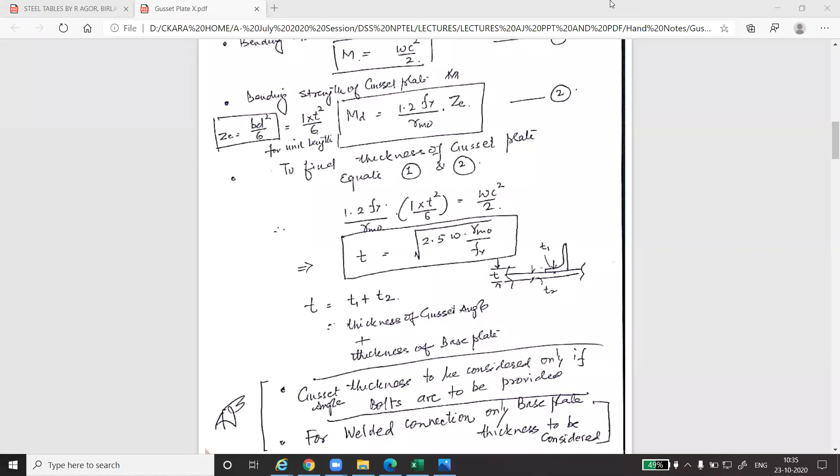Okay, the topic remains the same. We have been discussing the design of column bases. One simple numerical we have done for the slab base type, and just to make you aware about this process, what are the design criteria for gusset base type. So today's lecture shall focus on the basic design criteria, and we also try to solve the numerical based upon that. To save time, I think very quickly we go through the design criteria. The same topic shall be shared, and we shall try to solve the numerical comparatively at a slow pace, so that when we actually do the numerical, that will make things more clear as far as the basic design and fundamental criteria are concerned.

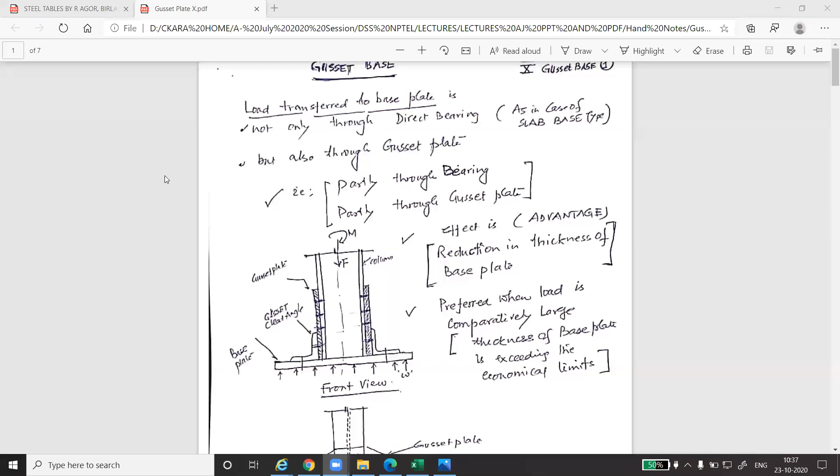Anyhow, so the topic itself says, right now you can see it on the screen, that is the gusset base. What is the gusset base? This process we have clearly discussed yesterday in one of the two lectures, that if the column, maybe I can open it to show you the basic of the gusset plate. The figure that you are seeing right now is the front elevation of the gusset base type column connection.

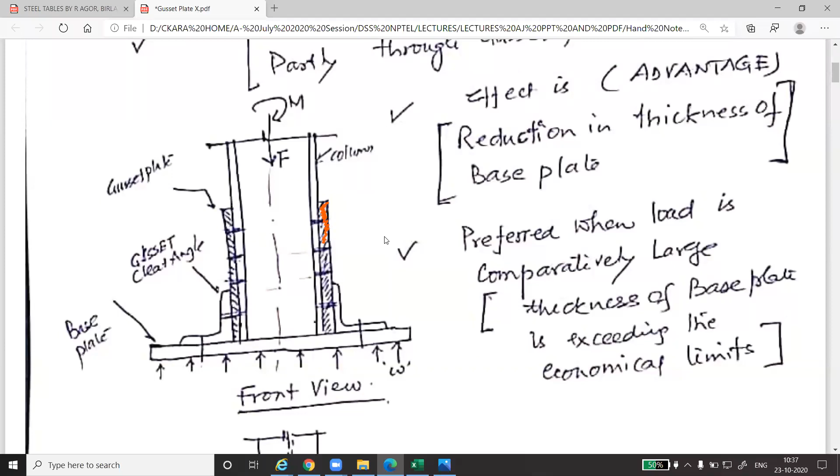In this, the portion that is shaded, like this one, and this one, I'm marking it in red. This is the gusset plate. If you look at the gusset plate from the side, it is... I think I should open the very first lecture on plates, column bases that we have done.

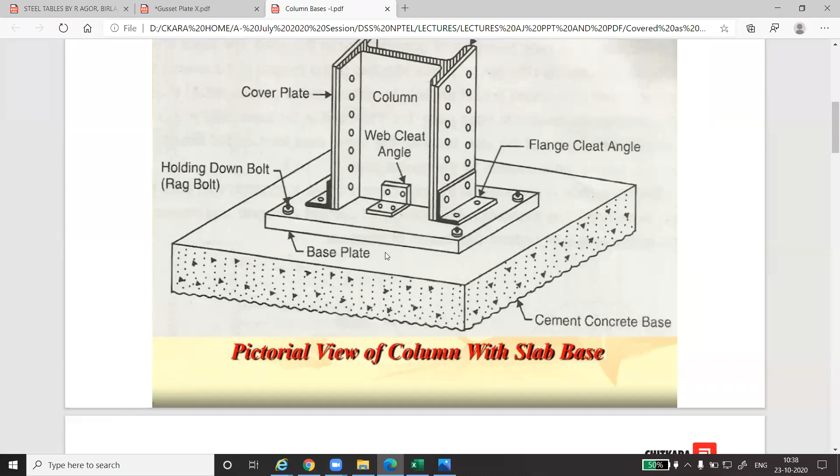This was the PowerPoint slideshow that was discussed in the very first lecture on column base, and this picture is the slab base type column connection. If you look at this figure, there's one member here which goes till the base plate, and the angle covers the bottom part of the plate. If you look at the plate from the side, its shape is like this. This is the side view.

So when the column is provided with the gusset plate, we say that this connection is a gusset type column base connection. And the question is, why do we need to go for the gusset base? This is the principal question, and I have highlighted it in brief.

Let me make one thing clear - do not depend entirely on the notes that I give you. There are many other things you need to refer to: your class notebook, and the textbook that was referred to you in the very beginning. You should always keep studying that, because during the lecture we are not discussing the sentences and other relevant details, which are not that important, but one should be aware of them, because if you do extensive reading, it is very easy to remember the things.

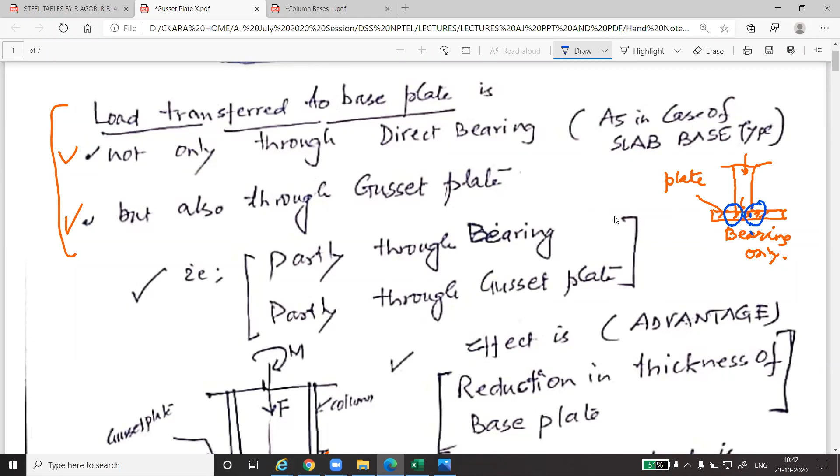And that arrangement is the gusset plate. When the load is more and the thickness of the base plate is coming out very large, we can always go for a gusset plate. That would help us reduce the size or the thickness of the base plate, because the gusset plate helps us partly transfer the load through bearing - that is the function which the slab is doing - and partly through the gusset plate.

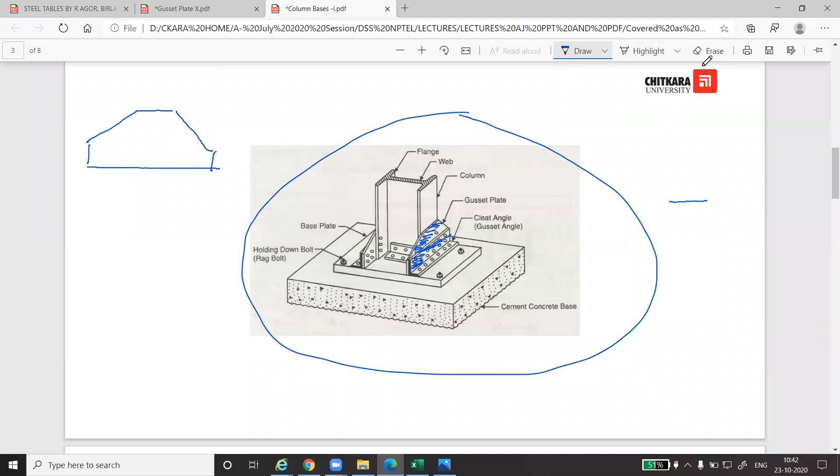If you see this figure - I am erasing this blue line. Now if you see this figure very clearly, you can see that the gusset plate is extending from this end to the far end of the base plate. That means it is spread across the full width of the base plate. If you compare it with the slab base, this is the slab base.

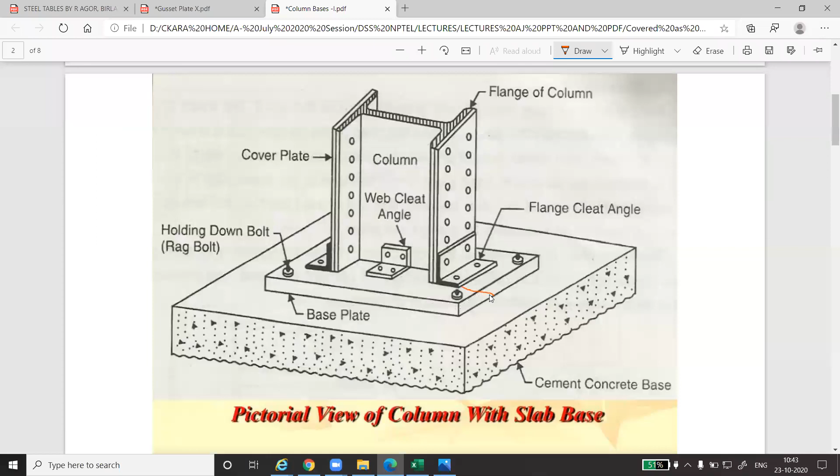Now in slab base, this portion is not covered, the angle extends up to this place only, whereas in case of the gusset plate, we extend the gusset plate up to the end, across the full width of the plate. So that also takes care of the moment, and it helps us to reduce the thickness of the base plate.

That is the prime function. If somebody asks you what is the need of going for the gusset plate when we have the choice to go for the slab base, the answer is that slab base transfers the load through direct bearing. Direct bearing. Like one of the girls was asking, what is the crush load, right?

Crush load, which load were you asking about? So squash load, squash load. So squash load is also the same as we are dealing with.

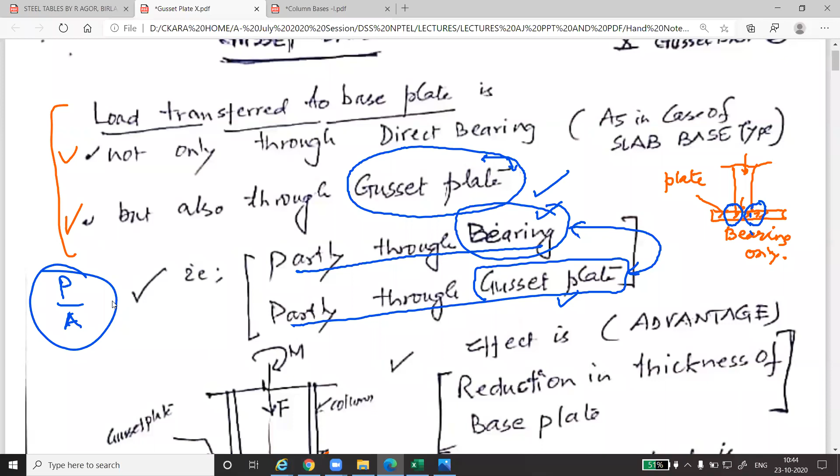We'll come to the answer of that later, but in this context, when we discussed compression members, we established that there are two ways of column failure. One is direct bearing, that is crushing load, crushing and squashing, right? These are two simple terms which are synonyms to each other. And another one is buckling, right? Buckling is the bending of that particular compression member.

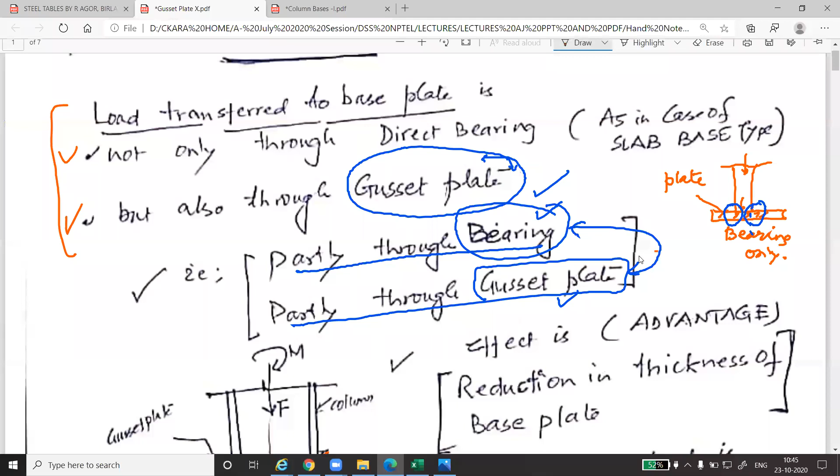So anyhow, I will come to that question later on, but in this context, the load with the help of the gusset plate is transferred partly by bearing and partly by the gusset plate itself, which extends across the full width of the base plate. And what is the advantage already discussed? The effect is that this reduces the thickness of the base plate. It helps us in reduction of the thickness of the base plate, and the size of the base plate is generally around 600 to 800 mm.

Like half a meter or three quarters of a meter, and almost the same width. That means it's a huge weight actually. So to reduce the weight of the plate and also to help us with safe transfer of the load to the base, we go for the gusset plate.

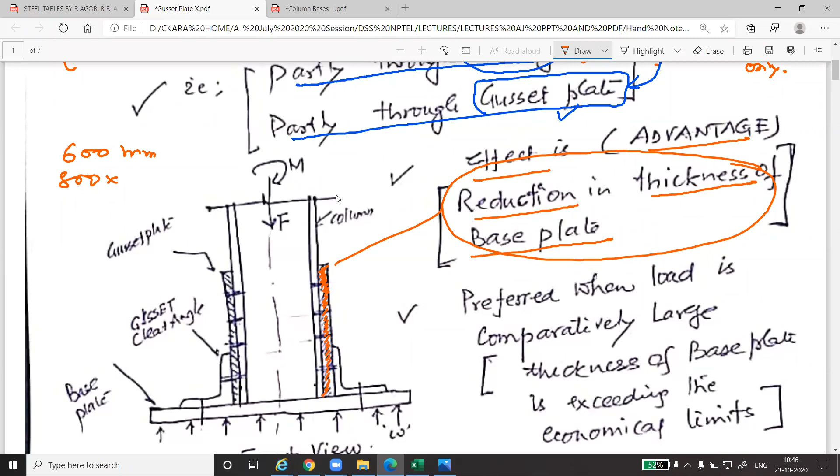And gusset plate, if you look at the elevation, it is provided like this. It has a certain height, right? And it spreads across, as I already explained in the diagram, it runs along the full width of the column, and the main focus is this portion. So if we separate its sides and draw its section, the side view, it looks like this. We taper this portion on the side, because the load is to be transferred vertically. This is just to reduce the weight of the plate, which is insignificant. So this is the general mechanism.

On top of this we then fix an angle, that is the cleat angle, the flange cleat angle, which also runs through the full length, right? So this is the view which you can generate from this side.

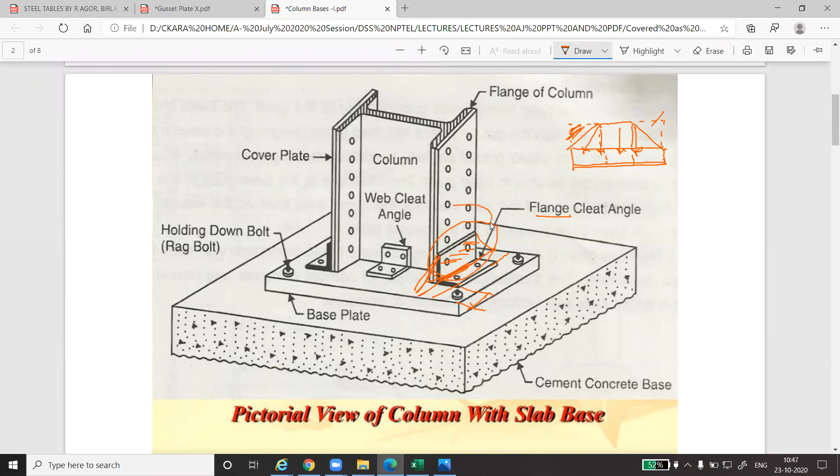Now coming back to this — this is the front view and this is the side view, which I have already shown you. This is the gusset plate, and it runs like this. It is tapered from the side. This is generally just to reduce the weight, because this portion is insignificant. There is no need to go for the full width across the full length of the plate.

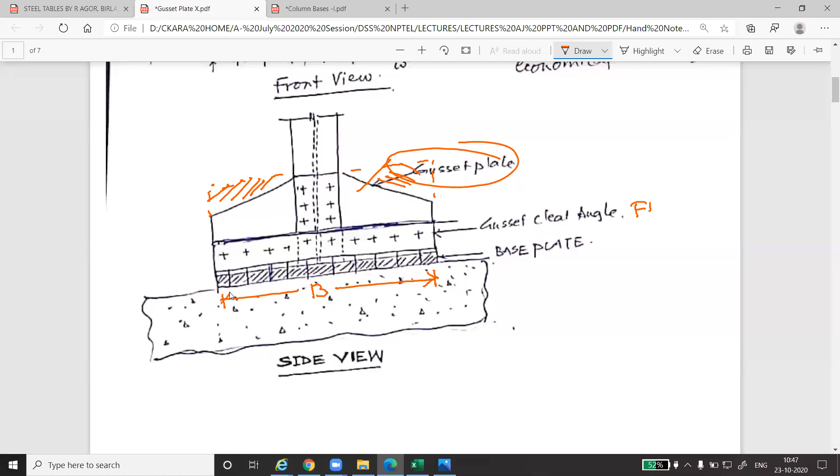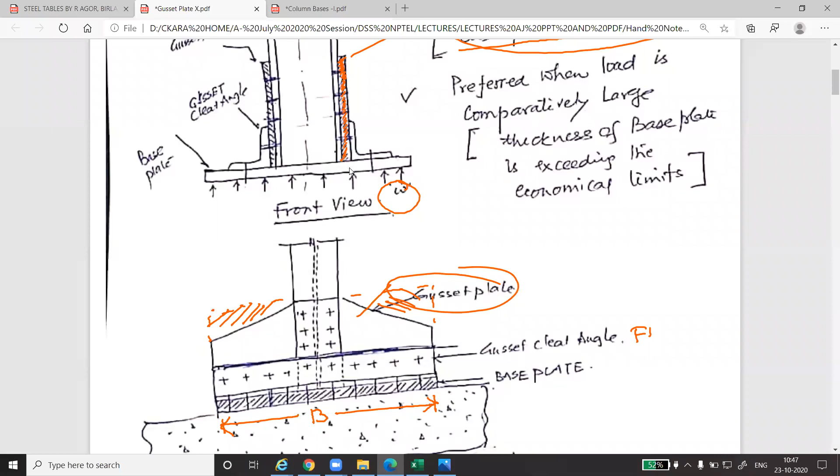And this one is the flange cleat angle. It also runs through the full width of the base plate, right? This is the side view. So hope you are clear with the views and the load which comes over the base plate underneath, that's the reaction, that is small w.

So keeping this basic drawing of the gusset plate in mind, now we are moving to the basic design criteria. And as already discussed, the most critical section is the edge of the column, the edge of the flange of that column.

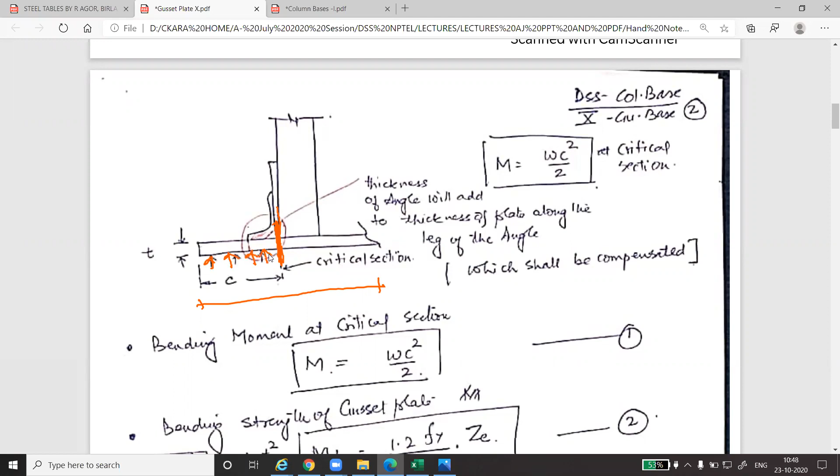And this is the total length, and the load which is causing the moment, like this moment, is due to this. And this moment is M equals W into C square by 2. If I draw it as a symbolic diagram, this is W.

And the moment of this W about this section — for example, this is the XX section, and this length is C, right? — this value is WC square by 2. This is simply WC into C by 2, right? We already know it. And this is the moment at the critical section.

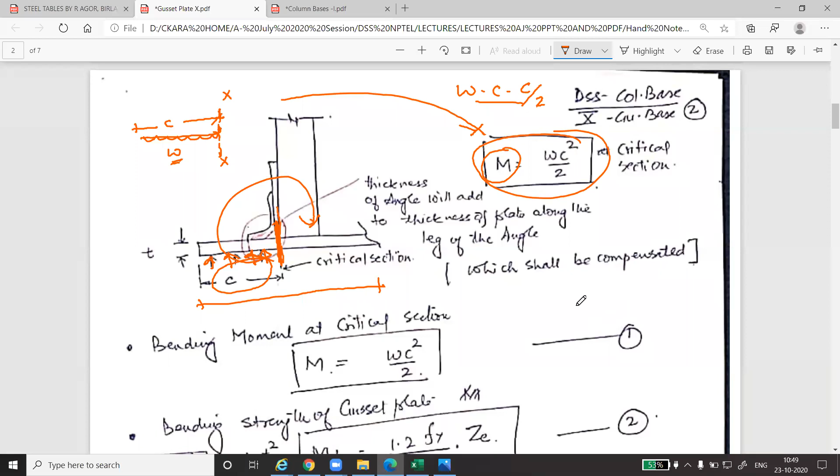There's one line written here: the thickness of the angle will add to the thickness of the plate along the leg of the angle. What does this line mean? Here it is written that... I'm just making it more clear here.

If you look at this section which I have circled here, there's a thick angle provided, as part of the flange angle. This is the angle, right? And wherever the angle is placed, the angle thickness is T1, and the plate thickness is T2. The total thickness required here also helps us reduce the thickness of the base plate.

We calculate the total thickness based on the bending moment that occurs at the edge, using this formula. The total thickness will be the thickness of the angle plus the plate below it. And the thickness above this section will be the thickness of this portion plus the thickness of that portion. If this is T1 and this is T2, the T that we shall be working with will be T1 plus T2.

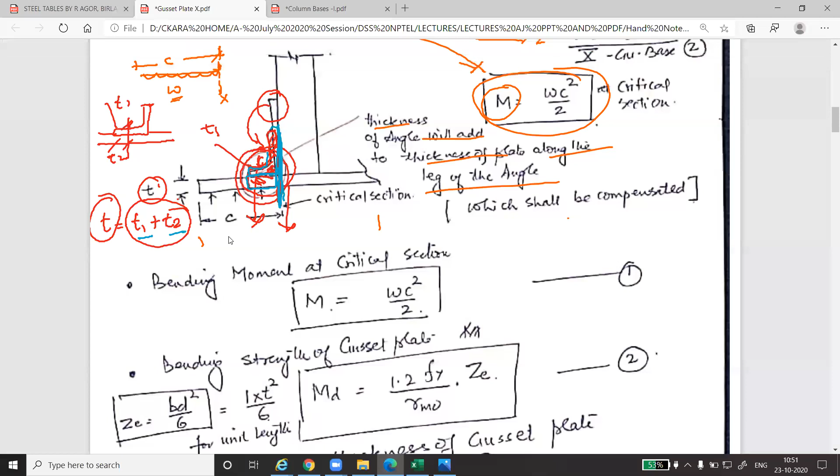So how do we calculate this thickness? We'll derive the relation a little bit, but you do not need to remember the derivation. You can directly remember the final relation.

The bending moment we have already worked out, that is WC square, and the bending strength of the gusset plate provided here is based upon M upon I is equal to F upon Y. This is the bending formula you have studied before, multiplied by these two factors. There's 1.2, so remember MD is equal to 1.2.

This is Fy, that is ZE. What is ZE, can somebody tell me? If you look at this formula, this is M is equal to F into I upon Y. And this I upon Y, this is the section modulus. If you remember, you have studied this section modulus.

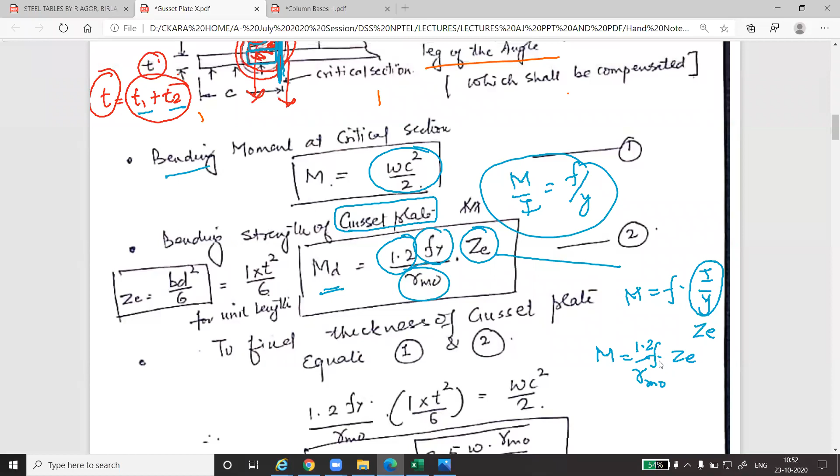So M is equal to F into ZE, and we have applied a factor depending on the design code, which you just need to remember. This is the formula we shall apply to balance this moment and the bending strength of the gusset plate, so we equate both these equations.

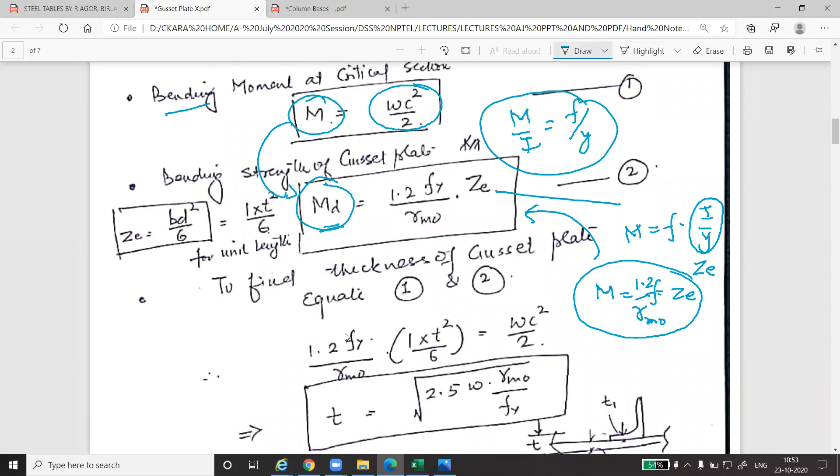I'm just rubbing it off. So we equate these two terms, M with MD, equating 1 and 2. This 1 into T square is the section modulus, that is B, as this is BD square. We calculate it for unit length, taking length as 1, and thickness as T. So keeping unit length and thickness as T, this is B, that is 1 meter, and T square, that is thickness, divided by 6.

So the formula 1.2 Fy divided by gamma MO is equal to WC square by 2. Equating both, we get this relation: T is equal to the square root of 2.5 W gamma MO divided by Fy. You can directly remember this formula for the thickness of the plate at the critical section. Let me reiterate: the thickness we are calculating is the thickness of the angle here.

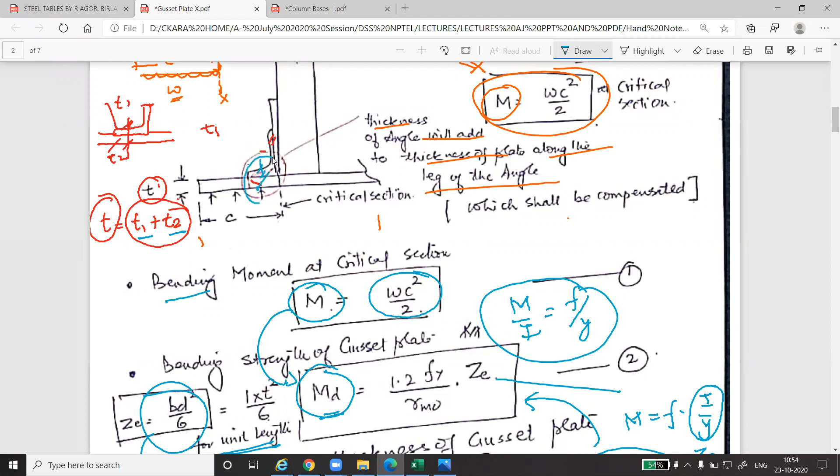Coming back to this diagram, the thickness that we are calculating is the thickness of the angle at the critical section. That means T1 and T2 here. This is what we are calculating with this formula, which says that the total thickness at the critical section is equal to...

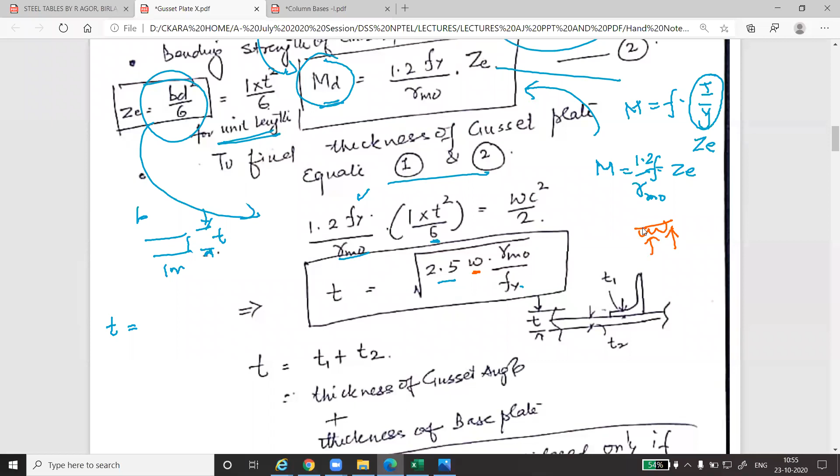2.5 W, where W is the pressure coming from underneath. This shall be calculated depending on the base area of that plate, as we calculated in the previous question. Gamma MO and Fy you already know, so T is equal to 2.5 W gamma MO divided by Fy. You should remember this.

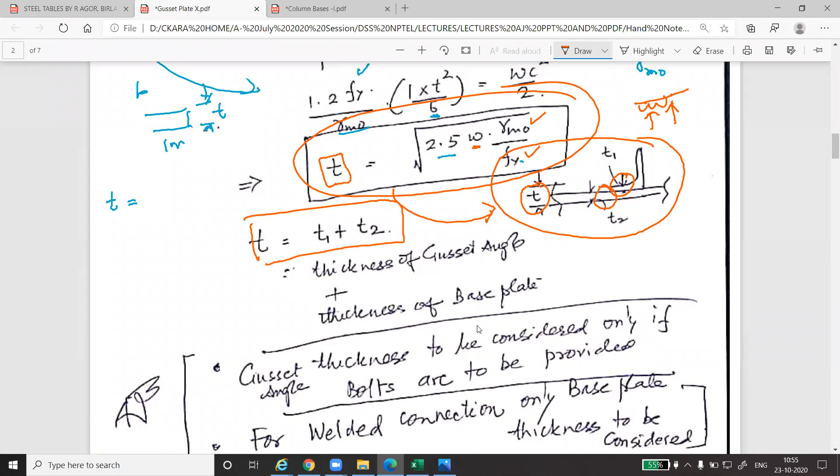Based upon this, it's also clear what we are talking about with the T. The T that we are calculating with this formula is the total thickness, that is thickness of the angle plus thickness of the plate. I'm repeating this so you do not make a mistake here. So we work out the thickness, T1 plus T2, and then we design the rest of the process.

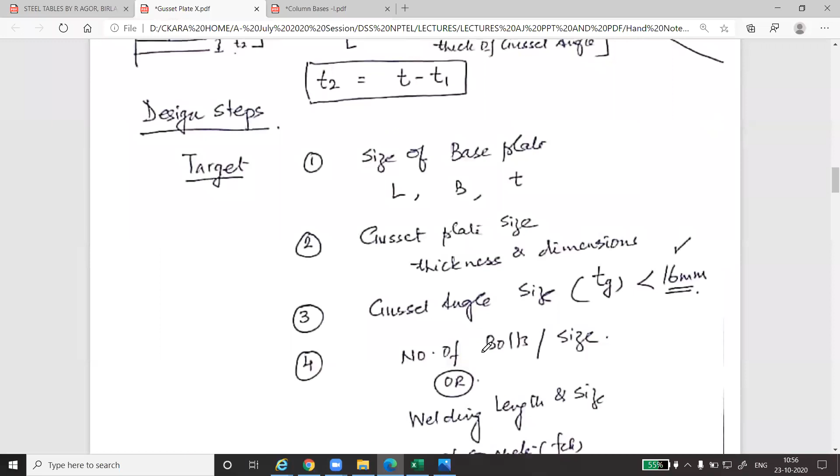We need to understand this portion, then we directly move to the design of the gusset plate connection. When we say we have to design the gusset column connection, what exactly are we talking about? The size of the base plate - as we did in the previous question, we have to find L, we have to find B, and we have to find the thickness of that base plate.

The second thing, which is different from the previous question, is that we have to define the gusset plate size, thickness and dimensions. This gusset plate, which is tapered, we have to work out its dimensions.

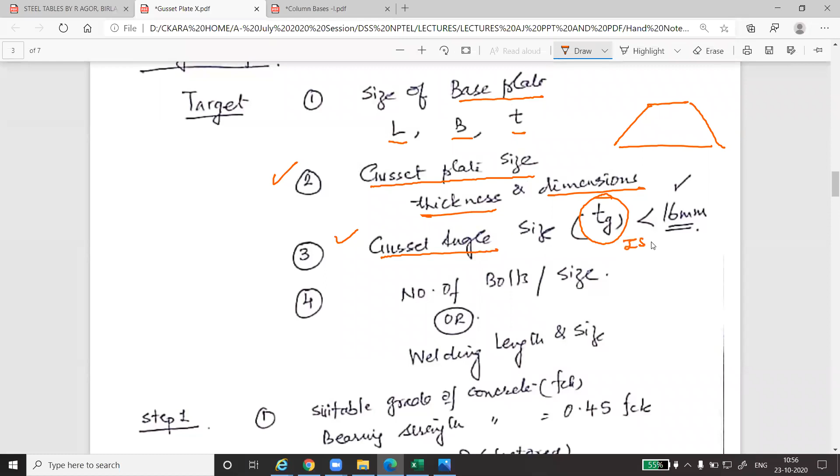Then the gusset angle TG, we have to design that, and the thickness - as per IS 800, the thickness of the angle that is to be selected for the gusset angle should be less than 16 mm. You should remember this, that TG should not be less than the thickness of the angle which is provided here.

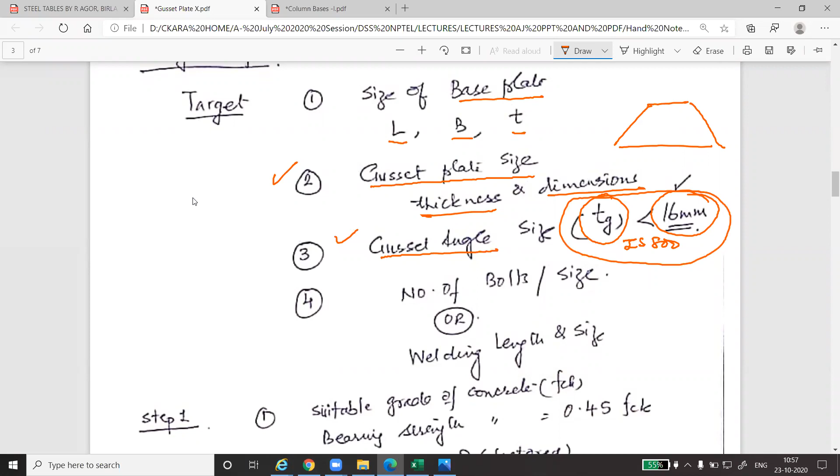This is the thickness of the leg. For example, ISA 150 into 150, we will check from the steel table which thickness is available. So we shall also be discussing this.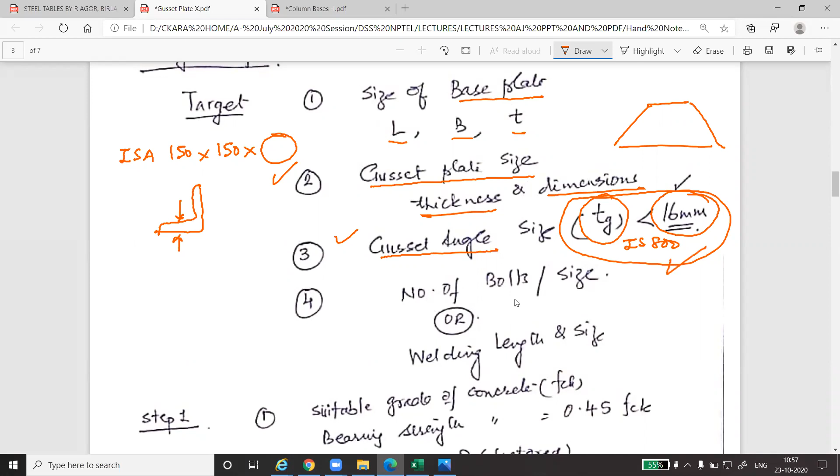Number of bolts is to be designed, and welding size if it is to be designed with the help of welding. So these are the design steps. First of all, as we have done in the slab base type, we assume the FCK.

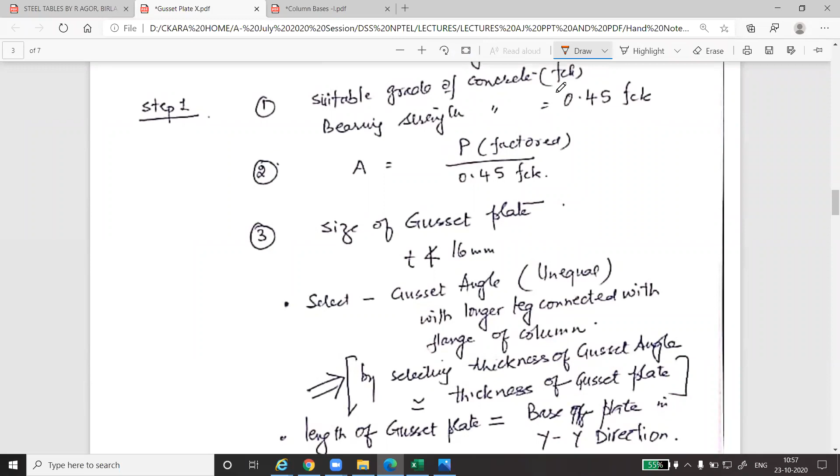If FCK is not given, it is the nominal characteristic strength of the concrete. For example, if it is M20, then it has to be 20; if it is M40, then we work out the bearing strength and the area required. We divide the total factored load given by 0.45 FCK to get the required area.

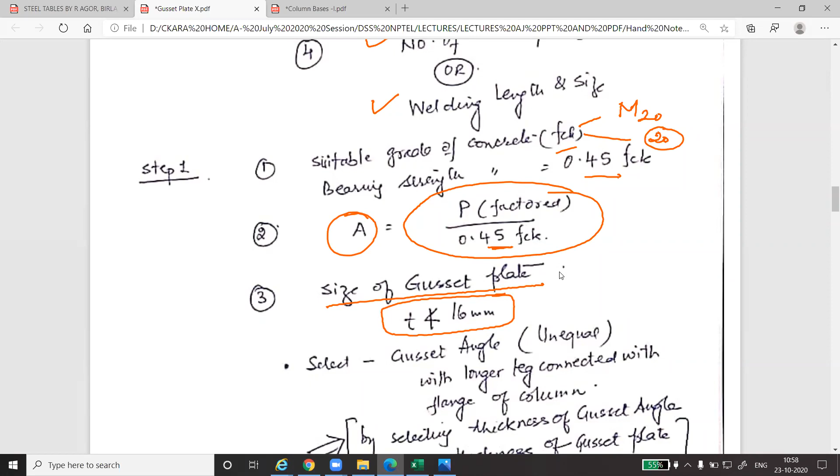Then we select the size of the gusset plate. As mentioned, the size of the gusset plate should not be less than 16 mm - thickness of the plate should not be less than 16 mm. All these steps shall be clear to you when we do the numerical.

So we are starting with the numerical. Before we start, let's look at certain basic dimensions that we shall be referring to. This is the plan of the gusset plate. This is the column, and this is the thickness of the flange here.

This dimension is the thickness of the flange, and this one is the thickness of the gusset plate, that is TG, and this one is the thickness of the angle, that is TA. From here to here is the length of the angle, and this one is the overhang. The same is on the other side. Are you clear with this?

If you look at the elevation, this is the side of the column, this is the flange width, this is the thickness of the gusset plate, thickness of the angle, and from here to here is the length of the leg of the angle, and the rest of the portion is overhang. We need to use this nomenclature to carry forward the design.

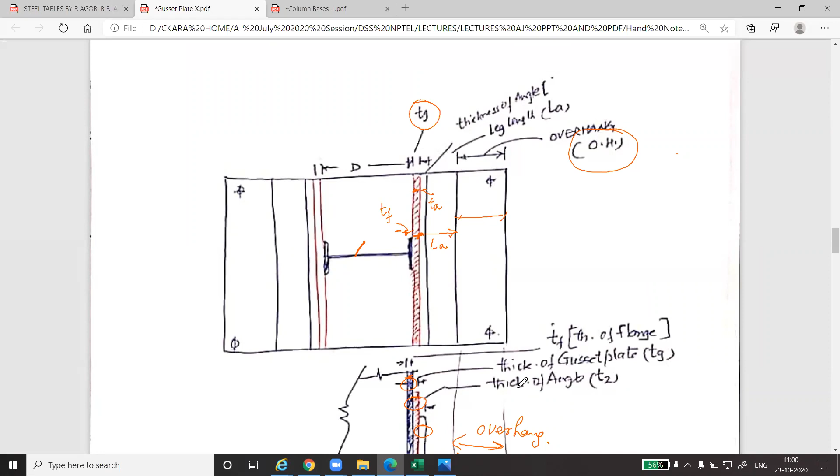Hello. Yes sir, please repeat the elevation once, sir. Elevation, this one. Yes sir. If you compare it with the plan, you can always see this - let me erase it once and redo it.

How many lines can you see?

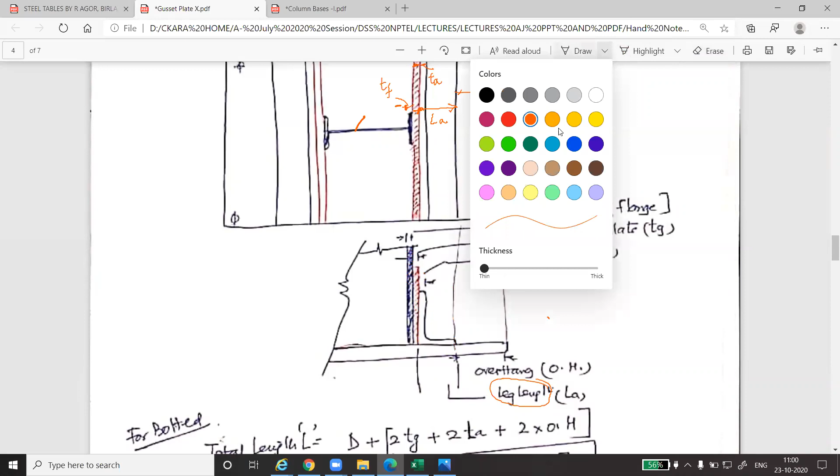This is thickness of the flange of the column, TF. Next is thickness of the gusset plate, this is TG. Then this one, thickness of the leg of the angle, TA.

And then the length of the leg, this line, right? This is LA, and then whatever portion is left at the end of the plate, that will be overhang, right? So moving ahead.

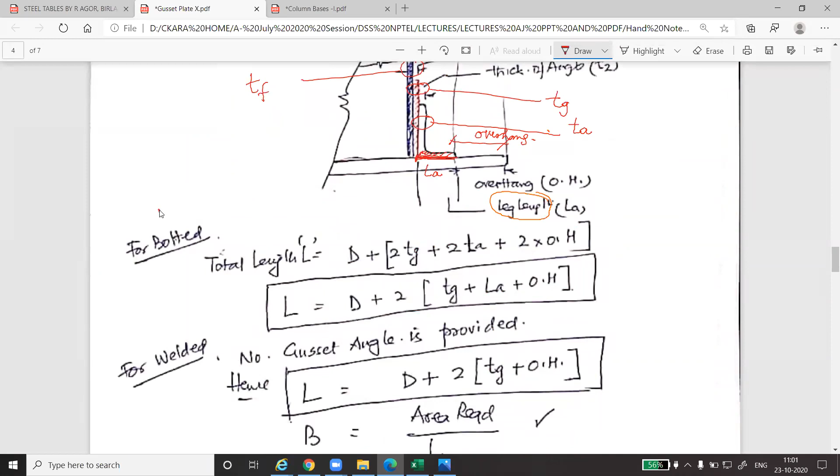The same has been mentioned here, that if the bolt connections are there, note this point - the angle, that is the gusset angle, connected with flange is only provided if bolt connections are used. If the bolts are not used, then we do not provide this angle.

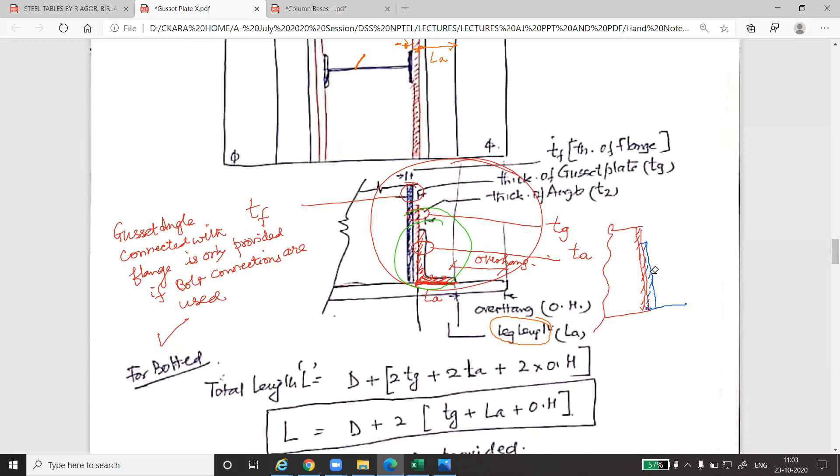So covering all these dimensions here, we are now looking at the total length of the base plate. The total length of the base plate is equal to D. You look at this diagram. The total length of the plate is from here to here, right? This will be the length, and this is equal to D, depth of the column, right?

Plus thickness of the flange gusset plate, that is fitted on both sides. This is 2 into TG, right? Next, plus what comes ahead?

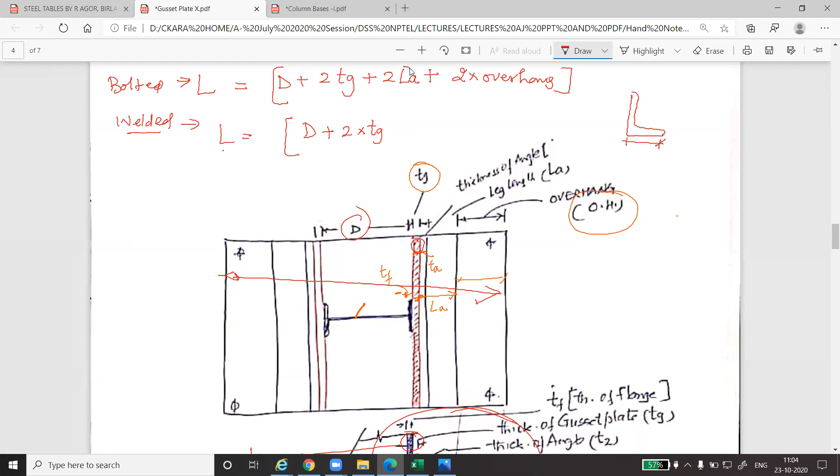Similarly, this is for bolted connection. If it is welded, then length will be equal to D plus 2 into TG. LA will not remain there - this will not be there because we are not providing the angle in welded connection. Plus 2 into overhang.

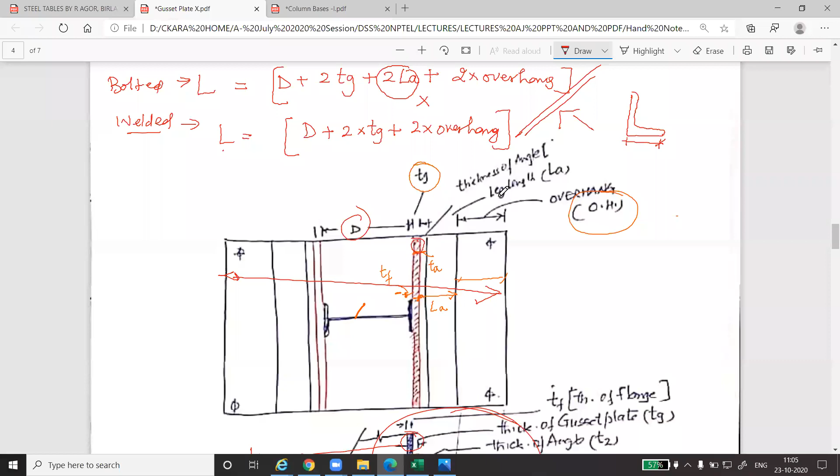So these two things you remember - just be very clear, not remember. If it is clear then automatically it's a simple addition of the dimensions, right? So then if you are done with the L, you can easily calculate the width, because width is the total area which is required divided by L. You can go for B, right?

Then you check step number 5, bearing pressure - is it force divided by area which we have provided, and it should be less than 0.45 FCK which we were discussing, what is 9 for M20 - this value is 0.45 into 20 and this is 9 Newton per mm square, right?

Then step number 6, thickness of the base plate - whatever formula we discussed, this is 2.5 W gamma MO divided by Fy. The value of W will come from here, gamma MO you know it, Fy you know it for the given steel. Then you can calculate the thickness of the base plate.

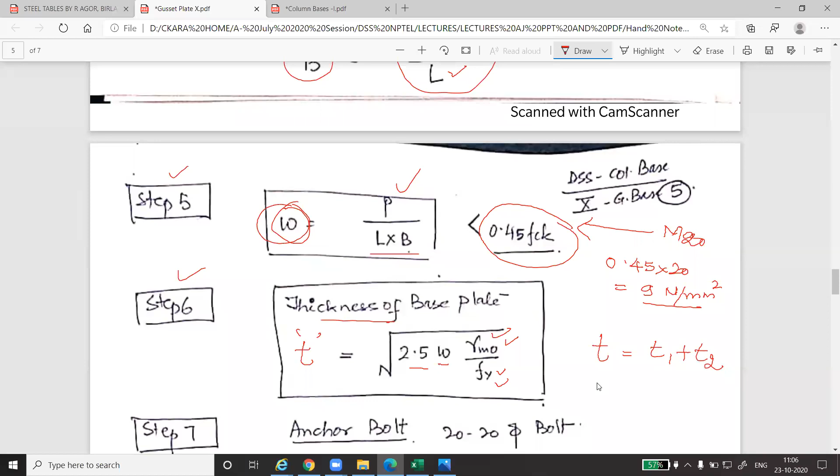And thickness of the base plate, mind you, this is the thickness of the angle if it is provided, if it is a bolted connection, plus thickness of the base plate, right? When we do the numerical, we will work this out that thickness of the base plate has to be total thickness minus the thickness of the angle. So this will be the actual size of the plate.

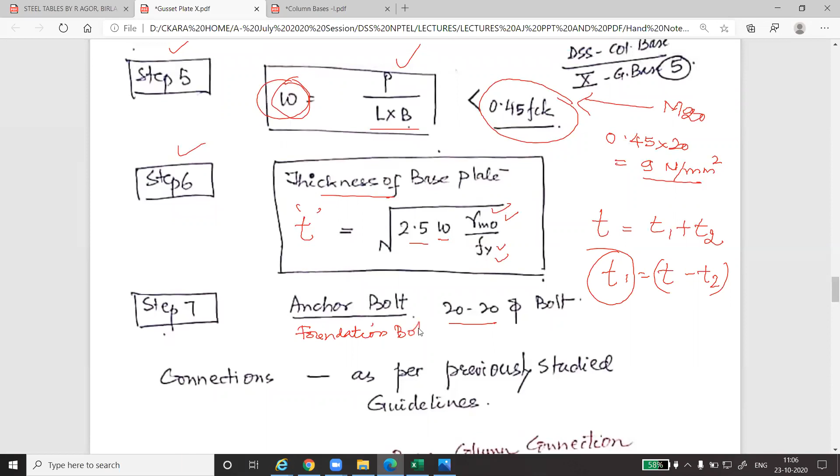Then anchor bolt, which we call foundation bolt, these are to be provided 4 numbers at each corner, 4 numbers, right? Length is also there. Then connection - if it is welded, then we have to check the welding length as we did last time. If it is bolt, then we have to calculate the bolt value, and then total load divided by the bolt value, we can calculate the total number of bolts, right? So with this basic process, we are now shifting to the numerical.

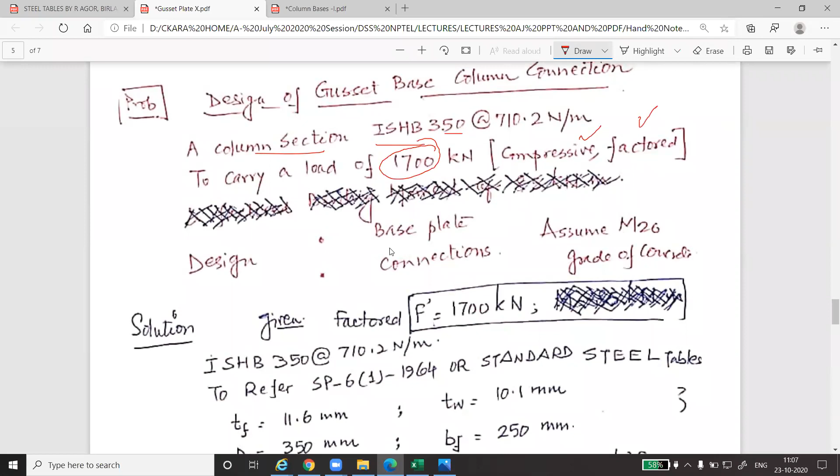You can note down the statement. A column ISHB 350 has to carry a load of 1700 kilonewton, compressive and factored. It is given, and then we design the base plate and connections. Assume M20 grade of concrete.

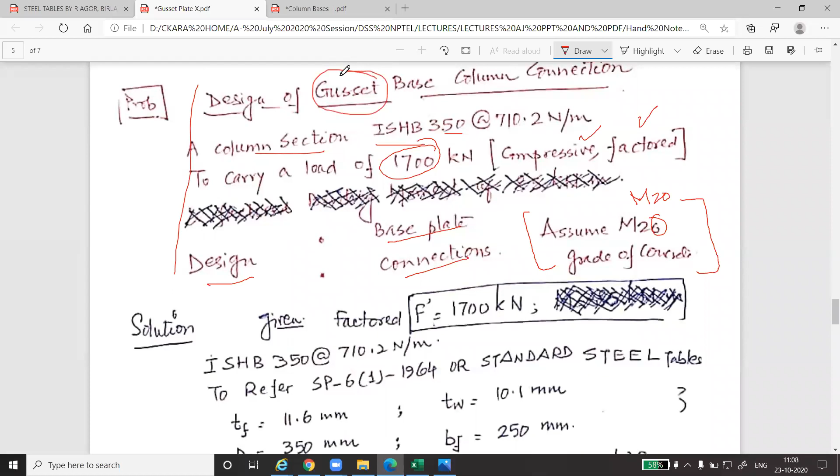This is a simple statement. We have to design a gusset plate connection. As we discussed earlier, it's always good to write down the basic fundamental dimensions and parameters from the steel tables or the IS code.

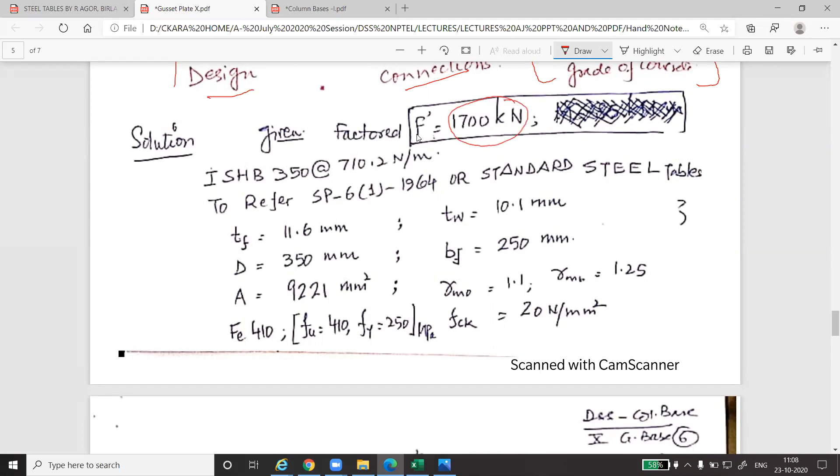This is given as 1700, ISHB. For ISHB, referring to the steel table, you can get TF. This is SP 6(1), which we already covered - the steel table is part of this SP standard publication 6(1), 1964. The steel table is copied here by the publishers because the rest of that portion is not required, so we always refer to the steel table.

So these are the basic parameters. Thickness of the flange, depth is 350. Area of the column is 9221 mm square. Thickness of web is 10.1. Width of the flange - these are the basic properties of the column given to us. All these dimensions are good to note down from the steel table. This dimension is 250, this dimension is 350. The rest of the dimensions, thickness of web and thickness of flange, are given.

Gamma mo is 1.1, you remember that so far. Gamma mb is 1.25, and for fe 410, fu is 410. These are the basic things you jot down at one corner of the sheet. Then we start with the numerical.

The very first step is to calculate the area required, the base area. This is factored load divided by 0.45 FCK. So this is 1700 into 10 raised to power 3 divided by 9. So the area required is coming out to be this.

You can also do the calculation in parallel. Just let me know if some calculations are wrong somewhere. Based upon this - this is important - you have to select the angle.

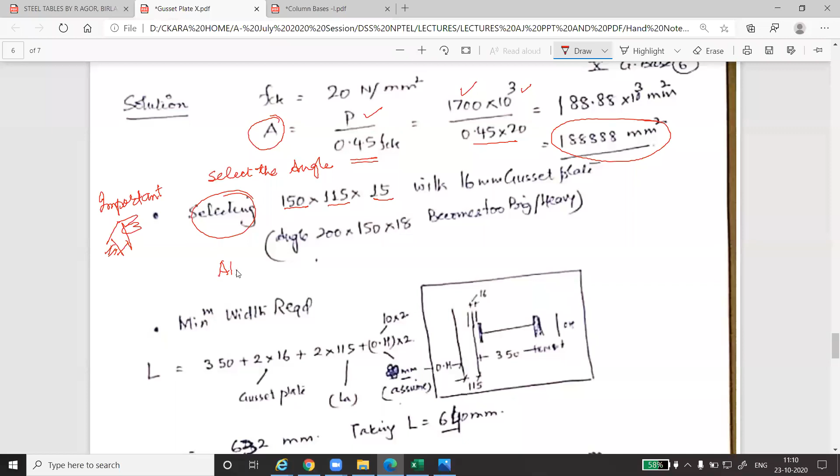Select the angle. We are presuming there is a bolted connection. It is 150 by 115 by 15. One thing you need to keep in mind here - always select an unequal angle.

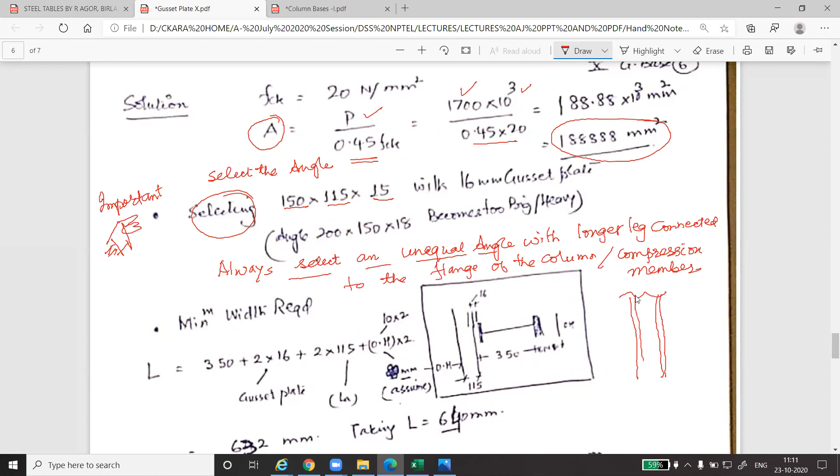Always select an unequal angle with the longer leg connected to the flange of the column or compression member. If this is your column here, this is the thickness of the flange, and the angle we have to connect should be unequal, because the more the length of the angle connected with the column, the lesser will be the thickness of the plate.

So this length which is 150 and this length is 115 - the longer leg helps to reduce the thickness of the plate. This is how it works - if we take 150 by 150 by 15, then this 115 required would be a wastage of material. So we are concerned with the longer length connected with the column.

You need to keep this in mind. First, always select an unequal angle, and then connect the longer leg with the column. So this is important. Now calculate the length, 350, as we just discussed.

This is 350, then 2 into thickness of the gusset plate, which we have presumed as 16 mm, because the minimum size of the gusset plate required is 16 mm - it shall not be less than 16 mm. We have presumed it here, so we can directly select with this 16 mm. We will check later whether this is sufficient or not. 2 into 115, this is length of the angle.

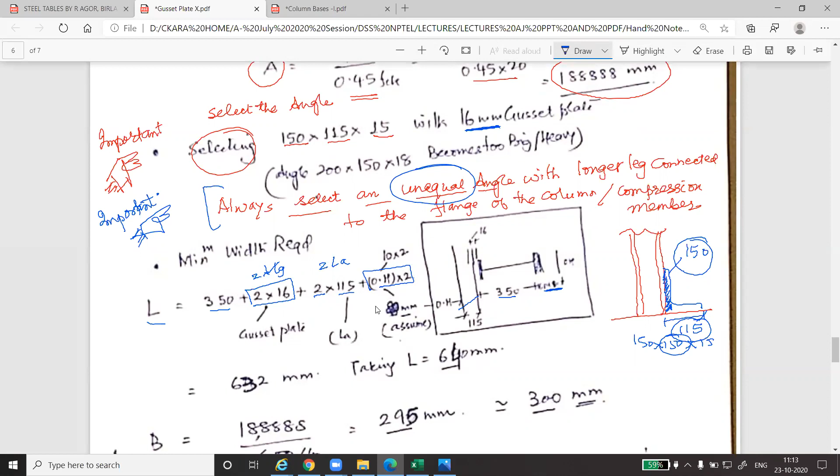This length, 2 into LA, 2 into LG, and then the overhang - you can presume it to be somewhere between 10mm to 20mm. This is also something you have to remember, because we will work out the length based on this. According to the length, then we will work out the pressure. If we need to increase the length later, then we will revise it, but for now we take it as 10 to 20 mm. So I have taken it here as 10. This is assumed.

This is LA. Thickness of the plate, gusset plate is also taken as the minimum. So we have worked out, adding all these figures, this is 632. So as per the calculation concerned, I have taken it as...

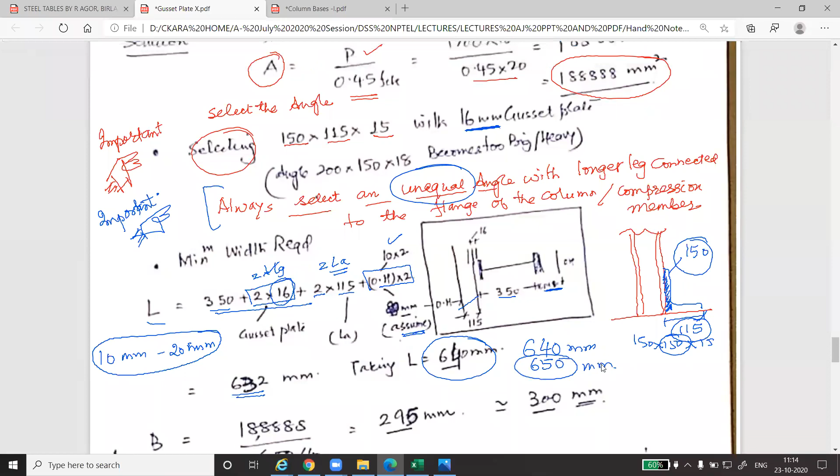640 mm, or to sound like a good figure, you can always go for 650 mm. Otherwise, you can always go for 640 or 650. So now the width of the plate, total load...

which we calculated above, divided by width of the plate, this is area, total area, then divided by the plate dimension selected. According to this, the width is coming out to 295, so I have taken it as 300. So ultimately, the plate that is required is 640 multiplied by 300.

Now we have to check whether this plate size is sufficient or not. Then we have to check the plate load divided by the area of the plate that we have selected. The selected size is here. I have taken it as 650. 650 divided, multiplied with 300.

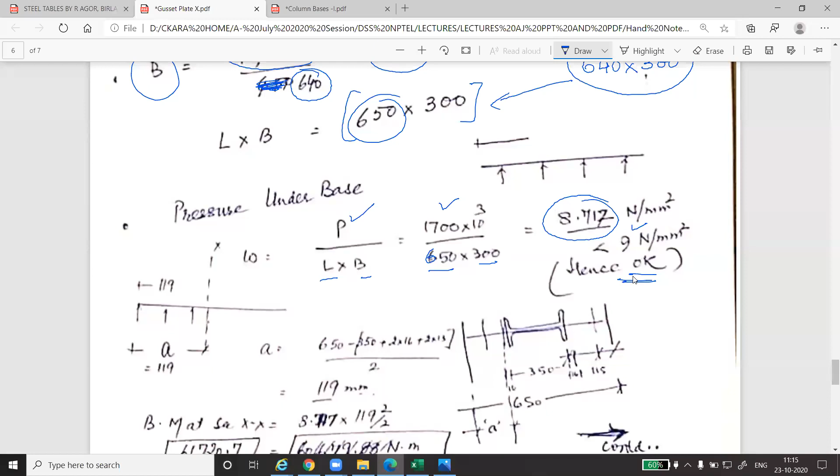So the intensity that is coming out to be 8.717 Newton per mm square, and we have to check whether it is less than 9 or not. So it is just sufficient, and we are well within the dimensions.

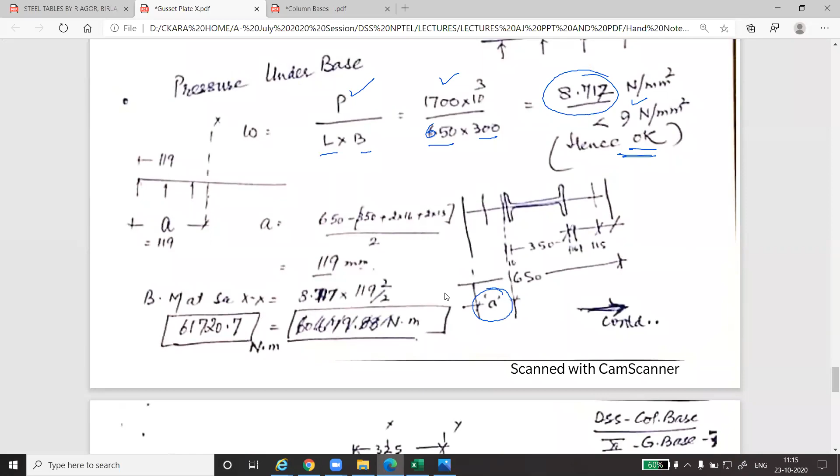Now we have to check this dimension A, the C which we initially wrote. If you look at this page, this dimension, so this C we have to calculate, because we need to calculate WC square by 2, and accordingly we need to check the thickness of the plate. So this is the design which is required to check the thickness of the plate.

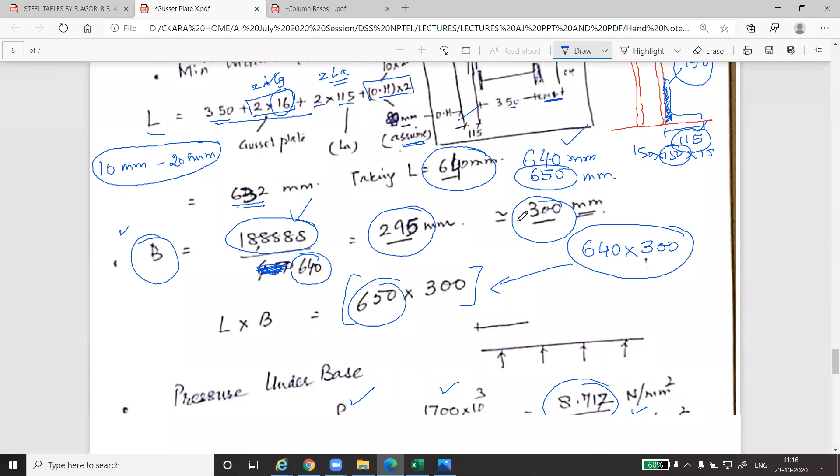To check the thickness of the plate, we just look at this figure which is drawn on the right hand side. The total length is 650. From that we minus 350, meaning we look from here. Half of 350, if you look at that, the whole figure is divided by 2.

The 650 minus 350 minus thickness of the gusset plate, that's 2 into 16, and minus the overhang. So if we work out, this dimension is coming out to 119, and this is basically A, or you can also name it as C. So according to this is WC square by 2.

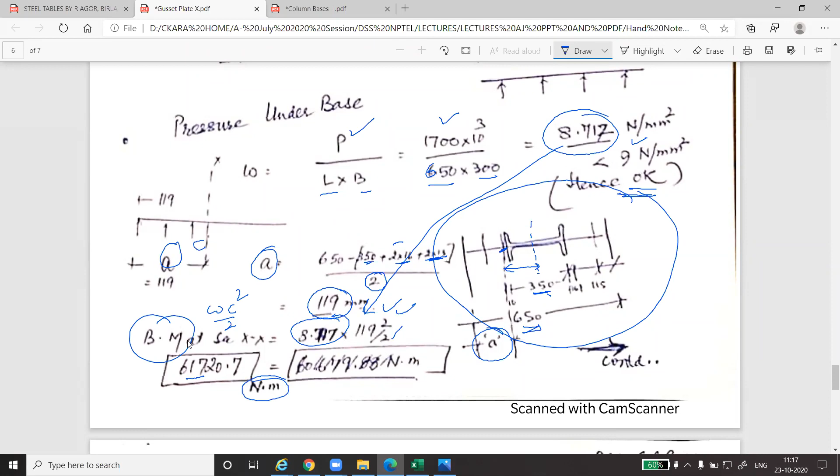W which we took from here, C square by 2, WC square or WA square by 2. This calculation of bending moment is coming out to be 61,720.7 Newton meter. Now this is the bending moment, and this is required to calculate the thickness of the plate.

Now if you look at this, bending moment, this is WC square by 2, and bending moment... right now you leave this portion, leave it. You start with this, equating...

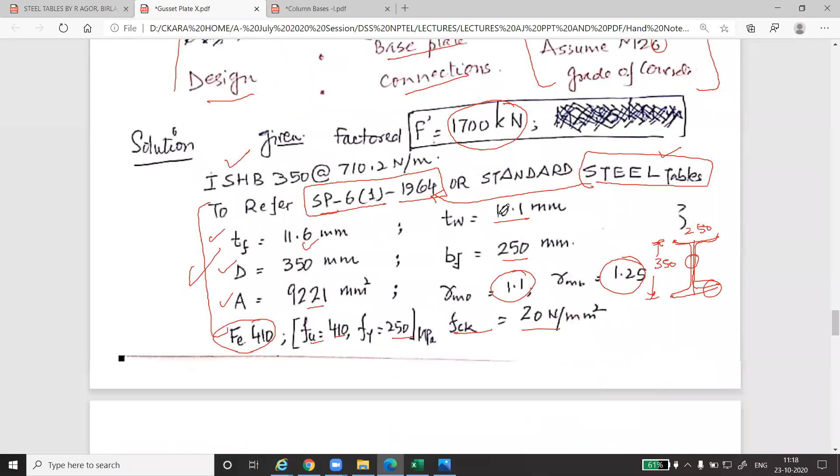Just work it out. 2.5 into 8.717 into 1.1 divided by... Sir, 0.30 is coming, sir. 0.30. Just hold on.

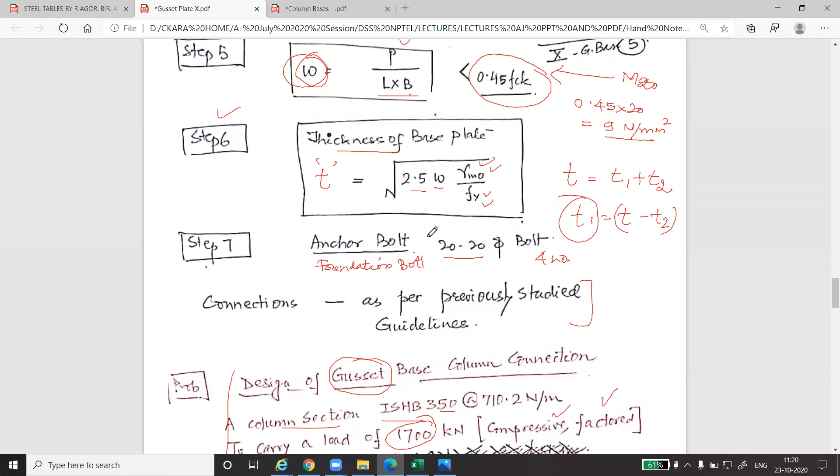Sir, I think some calculations are wrong here. So this one is coming out to be this one, 0.30, because W, I think we have taken it in per meter. So we have to multiply it to convert it into millimeters. So this will be 30, 300 millimeter, or we can say it is... no, just a minute.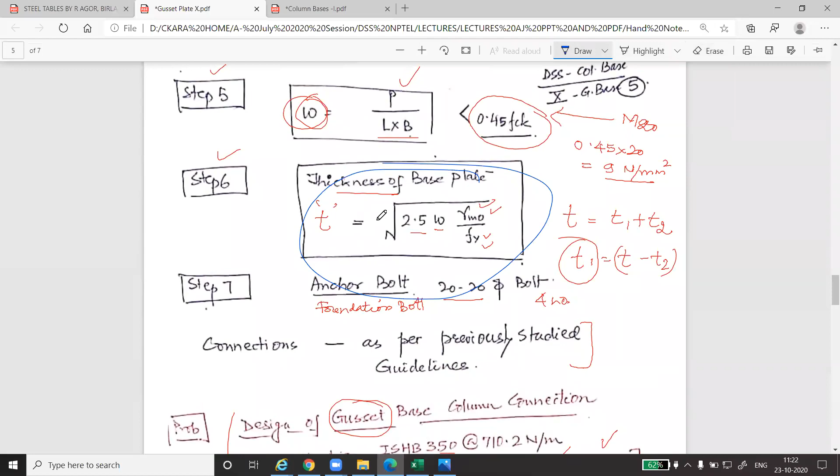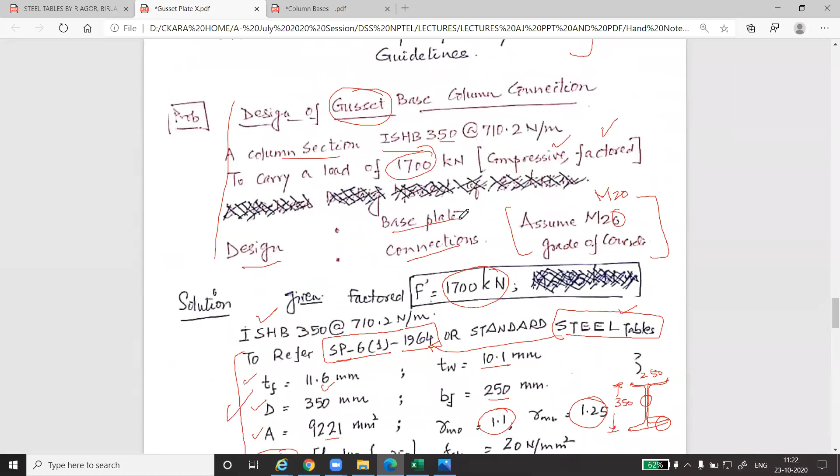But the base of this is that we have to compare the bending moment at the critical section with the bending strength of the plate. So if you compare, this is the bending moment, this is the bending strength of the plate. This bending moment that we have worked out is 61720, and this is the bending strength of the plate, that is 1.2 Fy upon gamma naught. These two factors are added over here, and this is basically Fy into section modulus, and section modulus is 1 into, that is BD squared by 6.

So BD squared by 6, and when we work it out, this dimension of the thickness of the base plate comes out to be 36.85 mm. So you just start with the basic process here, that we have to equate the bending moment of resistance, or the bending moment at the critical section, with the bending strength of the plate. So we do this, and according to this, the thickness of the plate is coming out to be 36.85 mm.

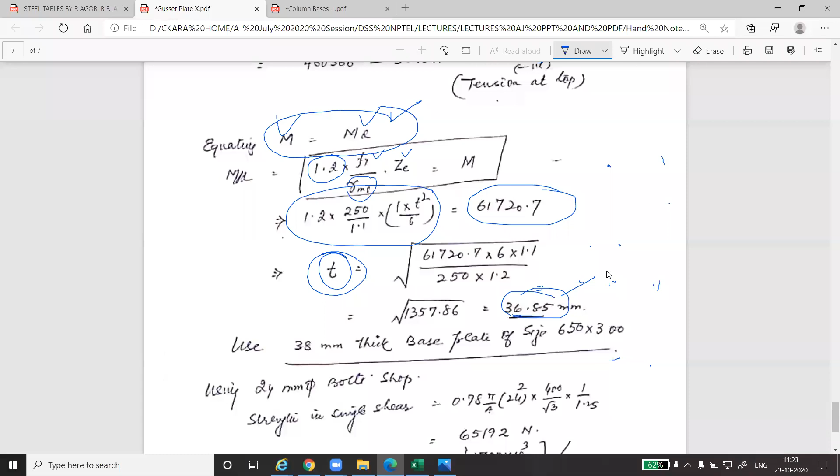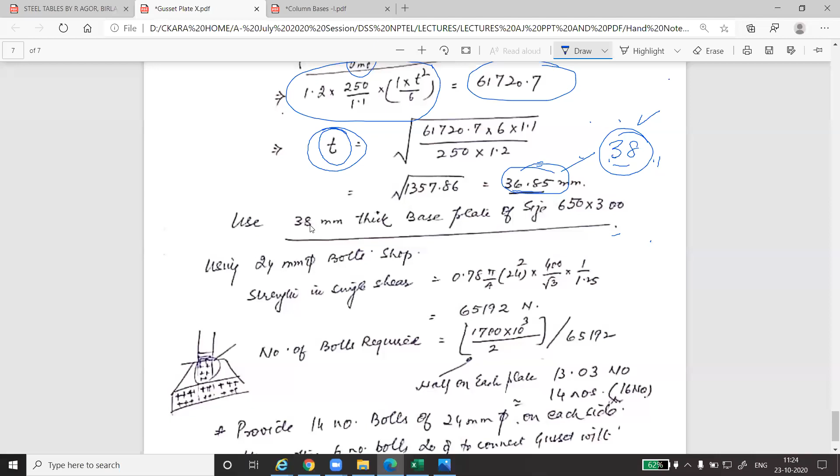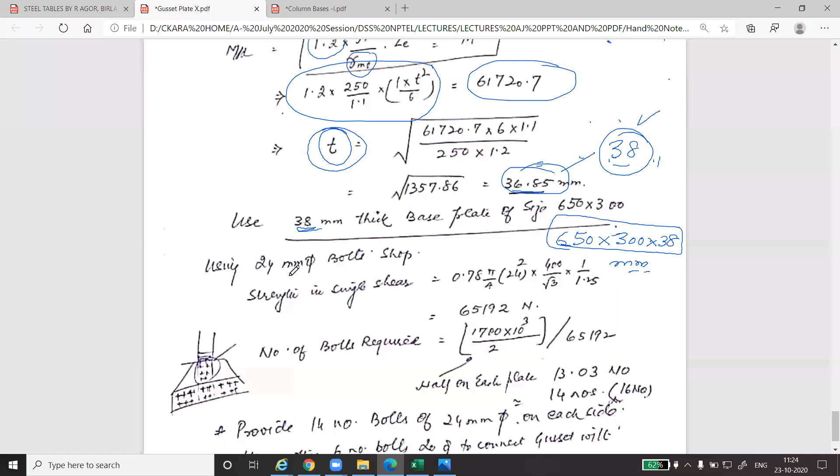So we are taking it as 38 mm. We cannot go for 37, always go for an even number. So using the thickness of the plate as 38 mm, our size of the plate comes out to be 650 into 300 into 38 mm. You can do a kind of homework for this: for the same design, without going for the gusset plate, if you check the size of the base plate, it shall be much more than this. That is the help we have taken.

So all these bolts are connected here. These bolts are the 14 number of bolts to be shown here, which are connected with the column, and that nominal diameter of nominal bolts are provided along the length of the bolt. Their number, equally distributed, is 14, so the rest of the bolts are to be shown over here.